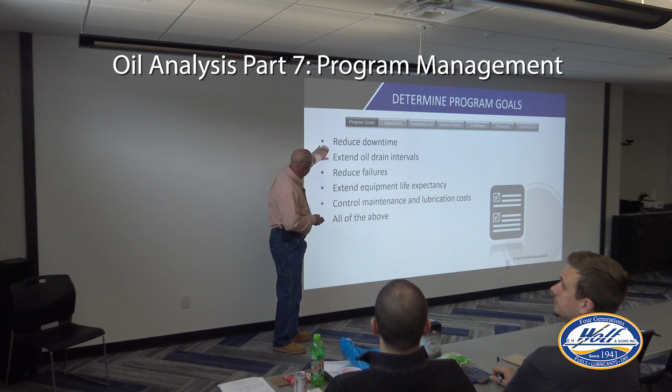So I put this together when I first got with the company. They said, what are the things we need to do to have an effective program? So I broke it down into 7 different categories. You got to have your goals for your program: reduce downtime, extend oil drain intervals, reduce failures, extend equipment life expectancy, control maintenance and lubrication costs. All of the above, or it could be something else. But everybody on your team's got to know what the goal is, what we're trying to achieve, what we're shooting for. If you don't know what the goal is, you're not going to hit the target.

So these are some of the ones we think are important. Now the next thing that's important is, I've been here 12 years and I've learned real quick that I can do training, I can do consulting with customers, but the programs that are successful are the ones that have somebody like each one of you inside that organization. Somebody that says, I'm going to make sure we got somebody keeping track of the data. When that report comes in, I'm going to make sure somebody's looking at it. We're not going to just drop it in a filing cabinet. We're going to actually follow up on the recommendations and comments from the analyst. And we're also going to make sure that oiler, that sampler, has been trained so he can give the best possible sample to the lab. So training is so important. Make sure you have that training for your personnel, but you got to manage the data and you got to have that sampler who's trained. Those people on the inside.

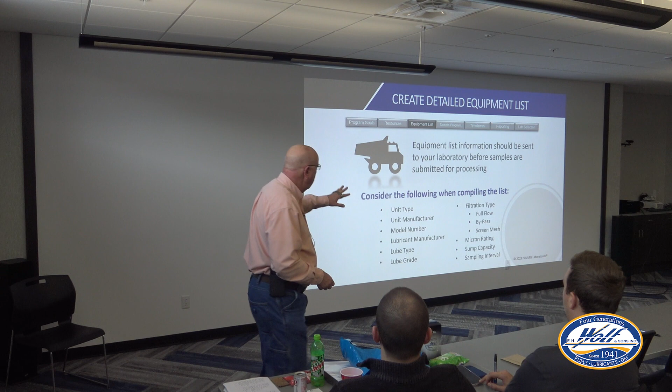The equipment list - this is everything that we want. Whenever you set up a fluid analysis program, and this is specifically to the marketer, distributor, sales reps: do not let your customer send in any samples until you have all this information set up and uploaded with the laboratory. We want to have all this information into the database. Once you do that, then they can start submitting samples. But this is everything that we need to see, much like what we talked about.

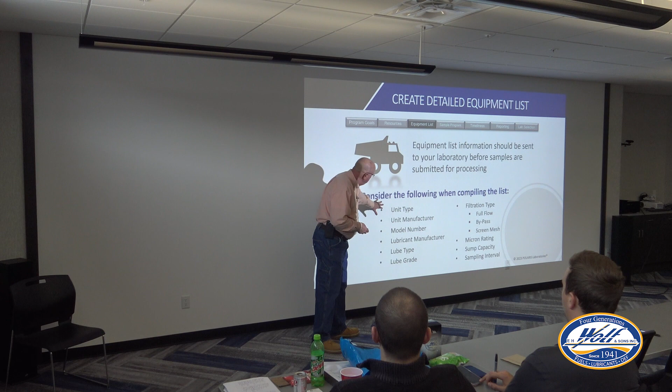I want to know the manufacturer of that component, what type is it, what's the model. I want to know about the lubricant - what's the manufacturer, what's the brand, what's the name of it, what's the viscosity. All that information's on the equipment list.

And then select the appropriate testing. I've told you I wouldn't do basic, I would do advanced. If you want to do extended drain, you can get extended drain comments from us. We want it to be predictive, not just preventive. We want to be ahead of the problem. And then determine your sampling intervals. We gave you some ballpark guidelines, but determine what works for you - what's best for your application, your severity.

Now, the importance of time. You got to take the samples at the proper frequency. You got to be consistent so that we can see that trend. Samples need to be properly documented - make sure we've got all the information we've requested. They're shipped immediately - ship your samples UPS, FedEx, DHL. Don't ship them with the Postal Service. I sent one time on my personal card just to check out the Postal Service - it took 12 days, so we don't want to be doing that. Use those 3 days. They're shipped immediately, don't wait until you get a 10-pack. Take a sample, put it back in. Don't wait till you get all 10 samples. Send those in individually - that's why you've got the individual mailers.

Receive the report and evaluate the findings. Take a look at it, read it, then act on the recommendation and issue work orders. And then this is the one thing that we don't get - we don't get a lot of feedback on what you did, what you found.

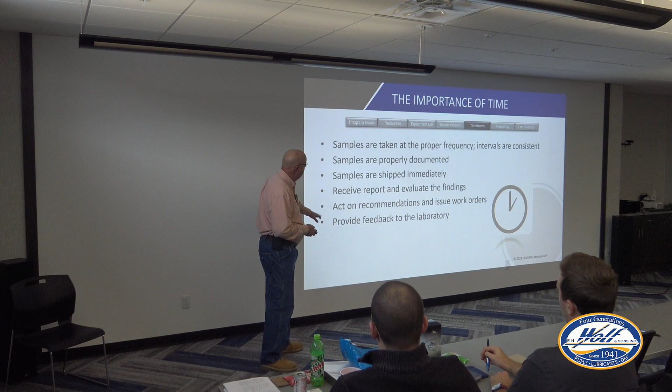You have the opportunity to say, hey, this is what we did, this is what it cost, and we think this is what it saved because we did a minor repair versus a major repair. What that does, then you can go back into Horizon and run a report, an action taken summary report, and it'll show all the actions you've taken for whatever period you pick, what it cost and what you saved. That's something you can take to upper management and say, here's what we're doing with our maintenance program, this is how we're using oil analysis to save money.

Reporting: report scheduled downtime of equipment, reduction in oil costs, uptime reports, failure reductions, performing and documenting cost savings due to oil analysis. Anything you can do to show upper management, hey, this $20 sample, this $25 sample saved me thousands, saved me 10,000, okay?

Had a customer that was an over-the-road fleet. If I told you who they were, you'd know it, you'd probably even see them on the road today. They came to us 5 years ago and they were doing oil analysis. They were spending $13,000 a year. Had a massive fleet, and they were only doing $13,000 worth of oil analysis a year.

A new guy came in, got to working with him, and he got to believing in oil analysis. He looked at it and said, Henry, if I actually started sampling all of my equipment at the proper intervals, I calculate that I would have to spend $250,000 a year to sample everything like I should at the right time. So I went to upper management and said, hey, we're spending $13,000 on oil analysis, but we're not doing it the right way. I want to spend $250,000. Will you sign off on that?

And the guy said, that's a no-brainer. He said, in November, we had 20 engines go down, and those engines cost $50,000 a piece, not to mention how much downtime and lost freight because of that. So he said, go for it. So they spent that $250,000, and the next year he was spot on, that's what they spent. But that's the guy who got the 59-to-1 return on investment I was talking about. He blew it out of the water. His vice president was all for it because he justified it, saying, here's what I think I can save.

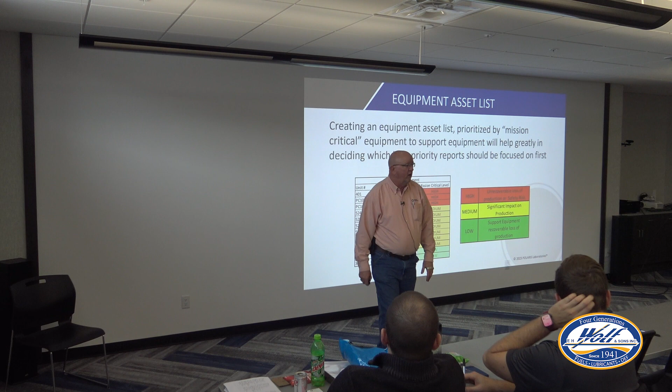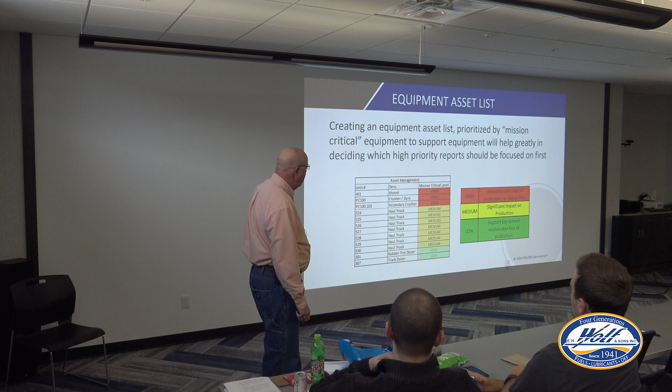So basically, he put these into these different categories. Whenever samples came in, if he had a severity 4 and it was on a component at a high level, that's what we got to jump on. But if I get a severity 4 at a low criticality, that doesn't need to be at the head of the line. He put that together, and I thought that's a very good thing for end users to do - go in there and say what's mission critical, what's not. And when I get a severity 4, if it's high mission critical, that goes to the front of the line.

Now, some of the things - I've got 30 customers that I work with. Some of the things we look at, we give them a scorecard at the end of the review. Every quarter we sit down and look at their data.

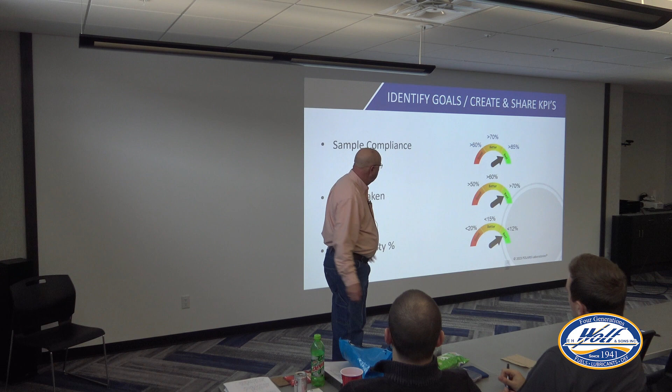On this scorecard we say sample compliance. What is sample compliance? When you submit your equipment list, did you sample everything you said you wanted to sample in a 12-month period? Did you sample 60%, 70%, 85%? Did you send in at least one sample on all of your equipment? If you're at 85%, that's great. We say 80% you're in compliance. So if you've got a list of equipment and you've sampled 80% of it within 12 months, you're doing okay.

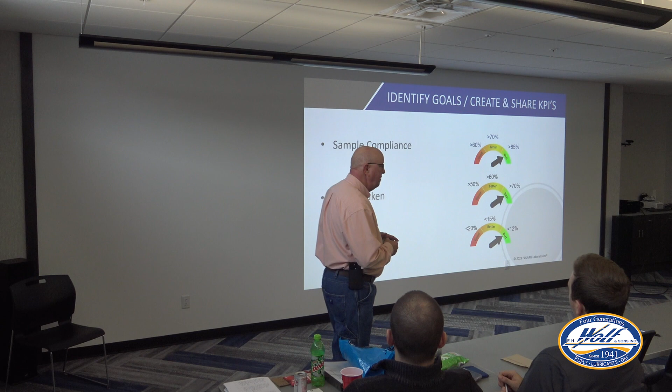Did you take action on the comments we sent you? Where are you in that category - did you respond to 50%, 60%, 70% of them? How'd you do there? And what's your high severity percentage?

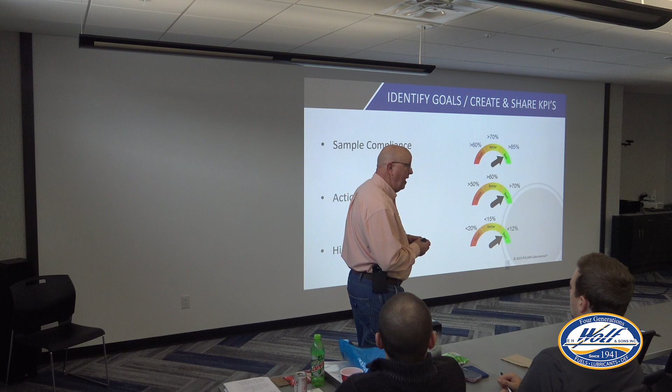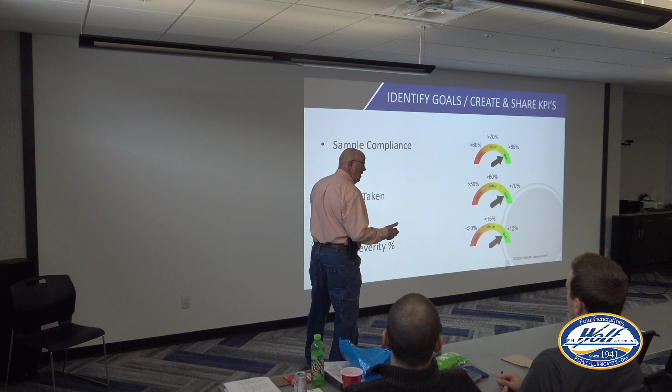When I'm looking at a customer, if it's a mining account, I'll know that in their industry, 17% is a typical high severity percentage for coal mining. Over the road trucking, 15%. How do we know that? We went back and looked at all the data. So when I'm working with a coal mine customer at 17%, he's going to say, Henry, what's my competition doing? I want to be better than my competition. So I tell him, coal mining is 17%. So he knows he has to get his high severity reports down.

And that 17%, that's a combination of 3s and 4s. When we say high severity, we're not just talking the 4, we lump the 3 in too. So that's why that 17% can be a big number, but you can get down below that.

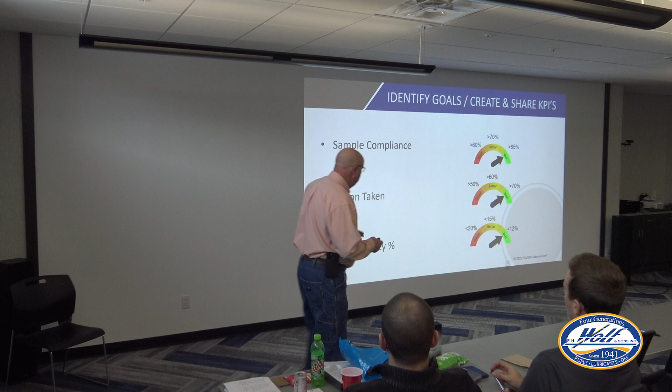And then I tell people - I've got customers I've been working with - when you get down below 10% on your high severities, your 3s and 4s, less than 1 in every 10 samples coming back as a 3 or 4, you've got a world-class fluid analysis program. I don't care what the application is, I don't care what the industry is. If you can get it down to less than 10%, that's world-class.

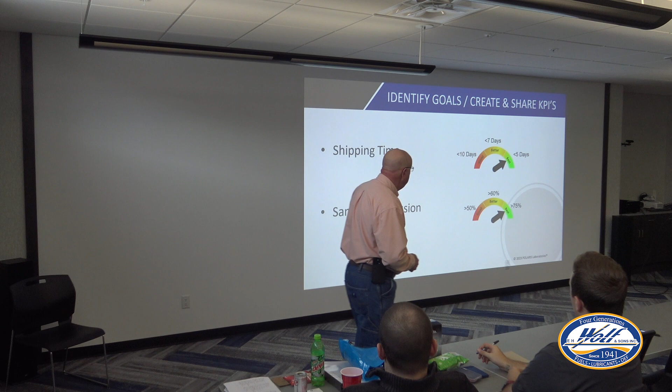Then we look at shipping time. How are you doing? We want to get it in 3 to 5 days, but less than 7 days is good. Longer than 7 days, we're going to flag it yellow. Longer than 10 days, we're going to flag it red.

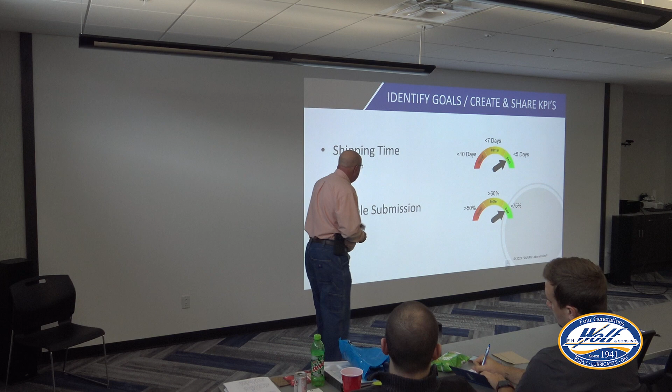Sample submission - how are you submitting your samples? Are you submitting with the paperwork? Are you submitting them online? Are you submitting them with the mobile app? How are you doing in that regard? We want to see everybody submitting samples online or with the mobile app.

The program champion that I nominated - if you walk into his office, you see all kinds of graphs. He's the head of the maintenance team. When they come in, they can see what's going on with their program. He does a good job of sharing that data, just different ways to share the data. And just looking at your key performance indicators, such as how's your scheduled work versus your unscheduled work.

How are we doing? Anytime you can take it from being a number to a visual, it really seems to be more impactful. He does a great job of having that in his office.

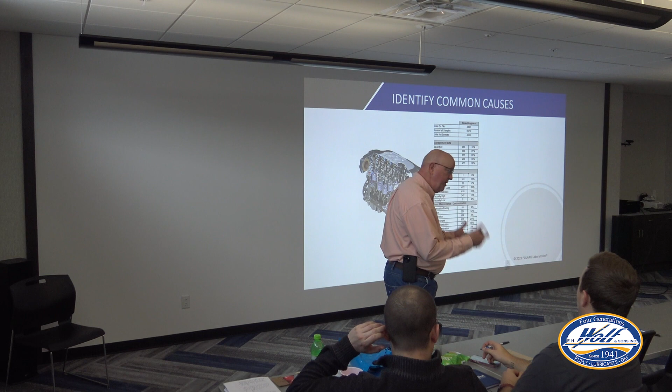All right, last thing we want to look at here. Let's say I go see a customer. One of the things I always do is take that program condition report where I look at: did you sample everything you said you wanted to? What's your high severity percentage? What's your shipping time? And then I take another report, the problem summary report.

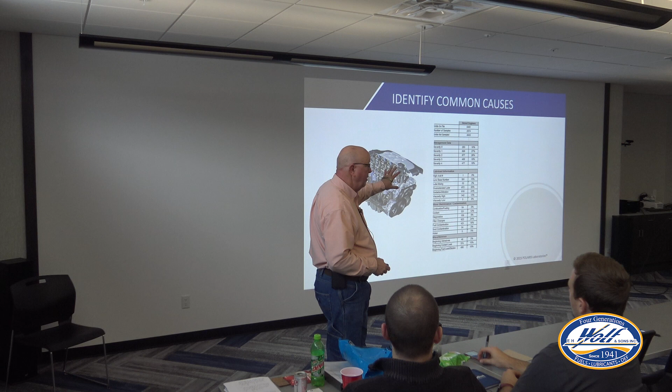How many people have seen a problem summary report? I've got some heads nodding in the back. I'd encourage you to get this report. These can be set up automatically, they come from Horizon. When the month closes you can get this the day after in your email. It'll list all of your components that you've sampled for that month, that quarter, whatever period you select, running toward the right.

Now this is for diesel engines. You might have hydraulics next to this, you might have final drives next to this, you might have differentials next to this, but this is just the example of diesel engines.

So when you look at that, what do you see? For this time period, he had 6,491 units on file. The number of samples submitted was 2,574. Units not sampled, 4,043. If that's a monthly report, I'm okay with that. If that's a yearly report, that means he's not sampling everything he should have.

So then we look at the high severity. What do we say high severity is? 3s and 4s combined, so normally 18%, 19%. He's at 37% high severity. Now I don't know what kind of account this was, but if it was an over-the-road account, he should be at 15%, that's what we typically see for the industry. He's at 37%. If I'm a maintenance manager, that's got my attention.

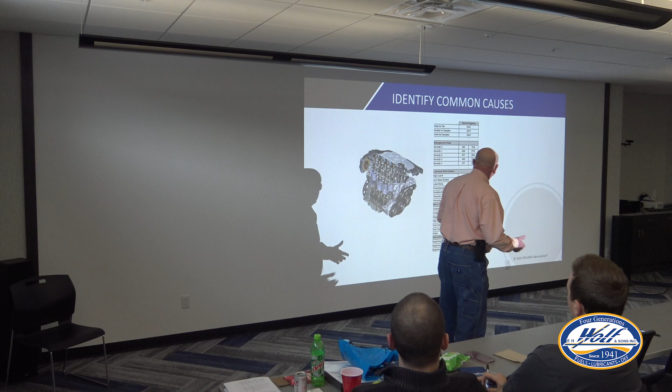So now I say, okay, why am I that high? Why am I getting so many 3s and 4s? Well, you come down here and what do you see? 15%, you've got a low base number. What do we say the base number tells you? That's when it's time to change that oil out. So he's got a low base number, getting close to that 2.0. That's part of his problem.

What else? He's got overextended lube, oxidation and nitration at 26%, 24%. He's got viscosity high coming back, and that's the most important test we run. He's at 13% of his reports coming back as viscosity high, which would make sense with the oxidation and nitration. So this is pointing out some issues that he has.

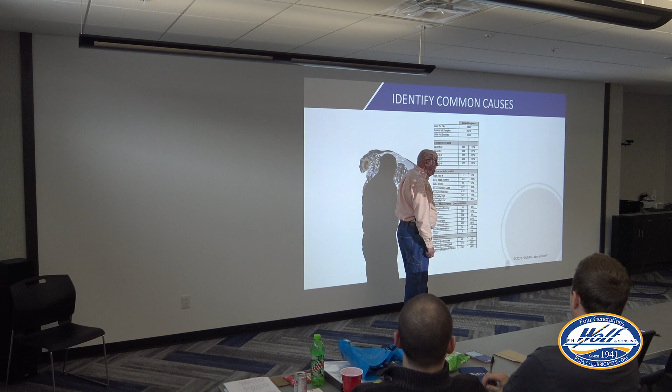The problem summary report may confirm what he's already suspected, or it may tell him things he did not know about. So then you can even take it down here a little further.

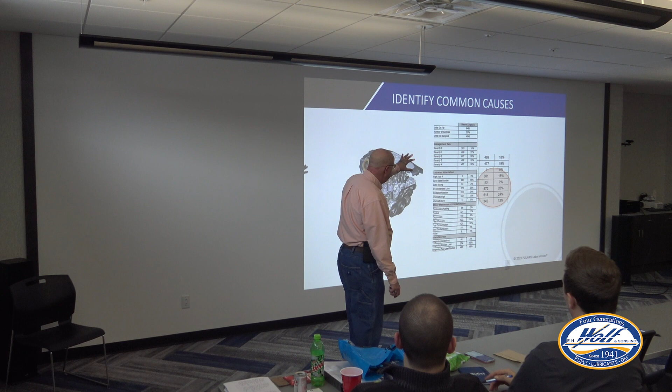Come on down here to the bottom and see that, okay, he's got an issue with fuel contamination: 16% of his samples are contaminated with fuel. He's also got a coolant issue here that we didn't highlight, 12%, he has coolant contamination going on. So that's the purpose of the problem summary report, it points these things out to you. I'd encourage you to get that on a monthly basis if you're not getting it already.

All right, and I'm going to leave you with this. Who is your champion? Who's your program champion? Are you guys the program champion? Is somebody else the program champion? That person's got to be passionate about saving the company money.

Fluid analysis will help you save the company money. He works from the inside. I can't do it, you got to do it. You guys on the inside have to drive it, make it happen. But you're not a lone ranger because you've got to go back and change the culture, got to get everybody bought into this idea of fluid analysis.

One of the things we do in our quarterly reviews with customers is have everybody on the call. When I start putting up one guy's numbers next to another guy's numbers, next to another guy's numbers on the tote board, what do you think that does for each of those individuals? They want to get better. We never point fingers, but we say, hey, these are things you need to work on. So you, the program champion, have to go back and change things. And with that, we're done for the day.